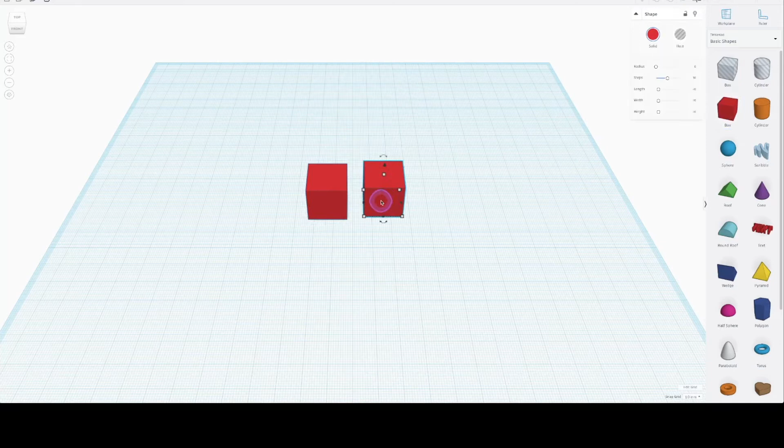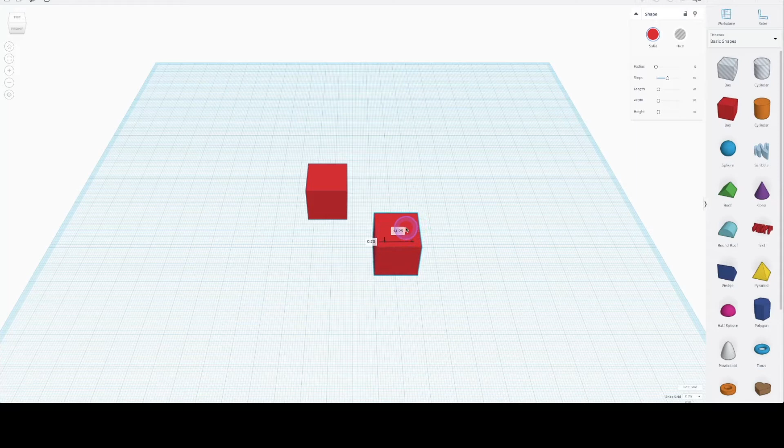Now, the one thing I also really like and most people don't use is the snap function. Snapping increments are very important in how we are dragging and arranging our objects together. I'm going to decrease my snapping to 0.25 millimeter, and as you can see, when I'm moving my box, it is moving in 0.25 millimeter increments.

I can even go lower or turn it off altogether, and I can just freely drag my cube around in any position I would like. So snapping is a really useful configuration, and I recommend that you check it out and play around with it.

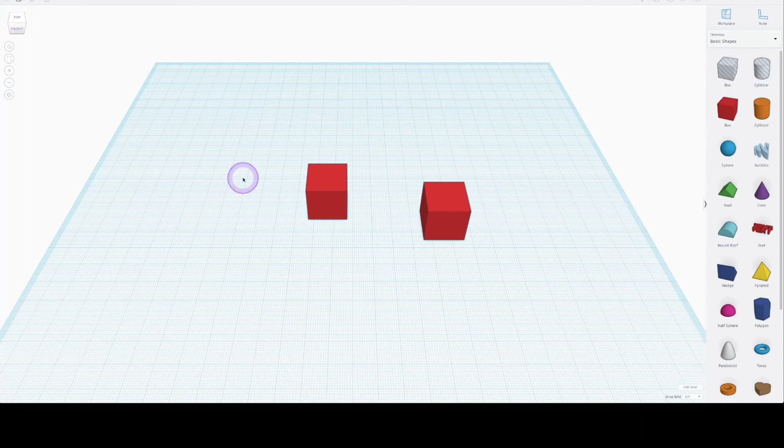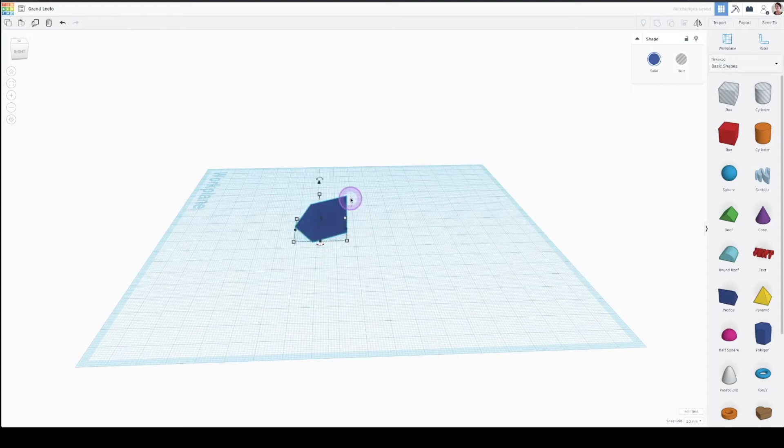Another tool I want to talk about is the mirror tool. In earlier videos, we talked about how to rotate an object using directional arrows or precise angle placement. The mirror tool is a way to quickly orient our object, like this wedge right here. I can use the mirror tool to quickly flip my object from left to right.

That doesn't do much, so I'm going to try it from this angle. And now I'm going to flip it upside down. So the mirror tool is very useful in quickly snapping shapes into geometrical arrangement.

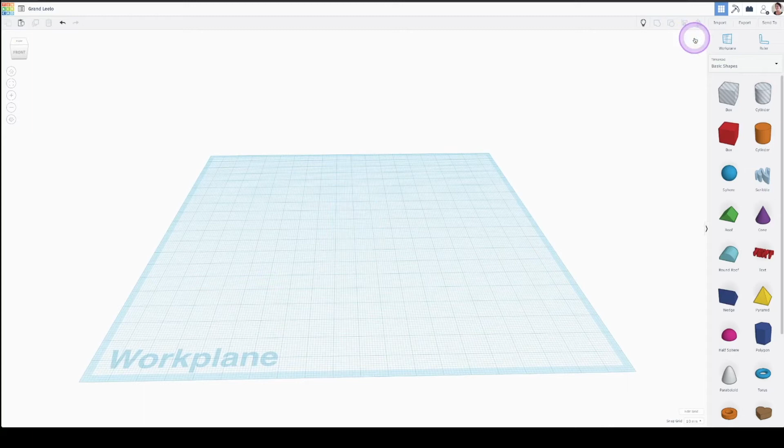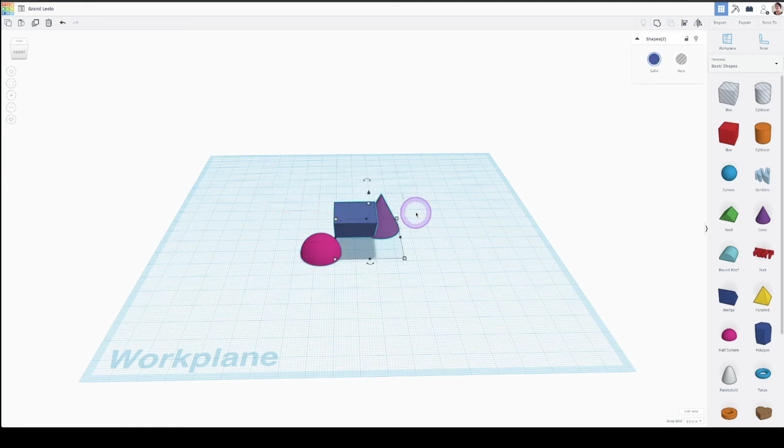The next thing I want to show you is the show and hide button. This is very useful when you are working with multiple shapes, because even if we can press F and focus on one particular object, I find that it improves my workflow, especially if I'm dealing with intricate design, to focus on only one object at a time. It also takes less processing power for your computer to display only one object instead of multiple ones.

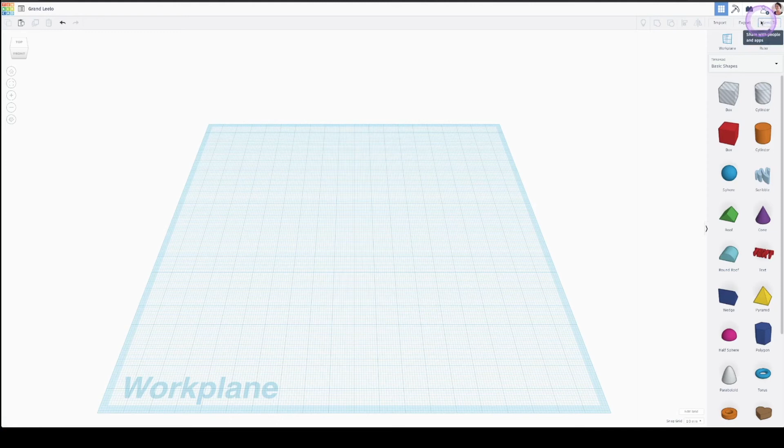So that was the last tip I have for you in this video. Now there are other functions inside Tinkercad, and I highly recommend you check them all out. Click on all the buttons, make as many mistakes and as many designs as you can, because experience and experimentation is how you truly will get better at 3D design and modeling.

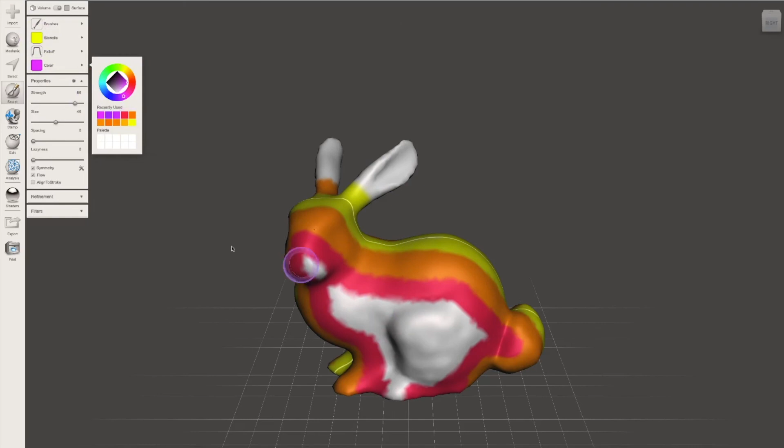This video concludes my Tinkercad for Absolute Beginners series. Now I am developing and will be releasing another series for intermediate users using Meshmixer. It is another free software by Autodesk that is very powerful as well as beginner friendly.